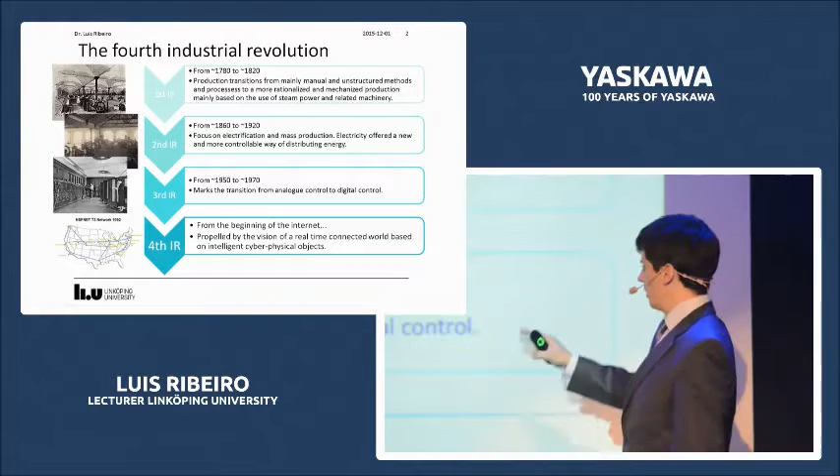You know that from the first revolution we got a lot of innovation, mainly driven by steam power and steam engines. And then later on we got the same with electricity and a lot of electrical power devices. The third industrial revolution is a little bit less concrete. It has to do with the transition from analog control to digital control. And a lot of things that we are anticipating to be within the fourth industrial revolution, we have inherited from digital control, from the third industrial revolution.

The fourth industrial revolution is a little bit special because of that. We cannot pinpoint one single key enabling technology. It's rather a convergence of many different technologies, and at the moment it has mainly a philosophical value. It's not much more than that. It's a vision propelled by the idea of the creation of a real-time connected world based on cyberphysical intelligent objects.

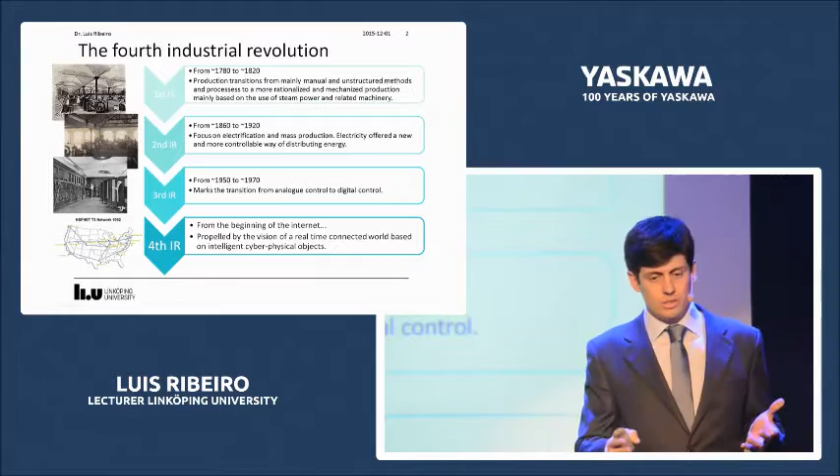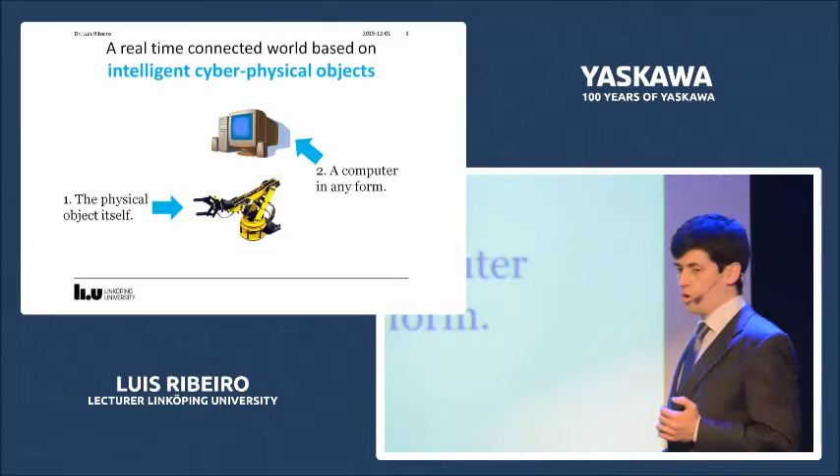Well, this is a mouthful of words. So what does this mean? It takes actually three ingredients to create a cyberphysical object: the physical object itself, any form of computer, and the connection between these two. But this we knew already from the third industrial revolution. This is how our factories are working today. We have a lot of computer-controlled equipment, and we have a lot of communication already between this computer-controlled equipment.

What is really new is that now we are creating a cyber representation, a kind of intelligent layer on top of this whole. And this intelligent layer is really important because objects will start to do things not because they are programmed to do so, but because they are programmed to choose what they want to do. They are programmed to interact with other objects, and they are programmed to learn automatically about other objects.

So one robot will know that another object it's interacting with is a robot, or a human, or a station. And therefore that object will adjust automatically. It will know what to expect from that other robot, from that other human, from that other station. And this is really new.

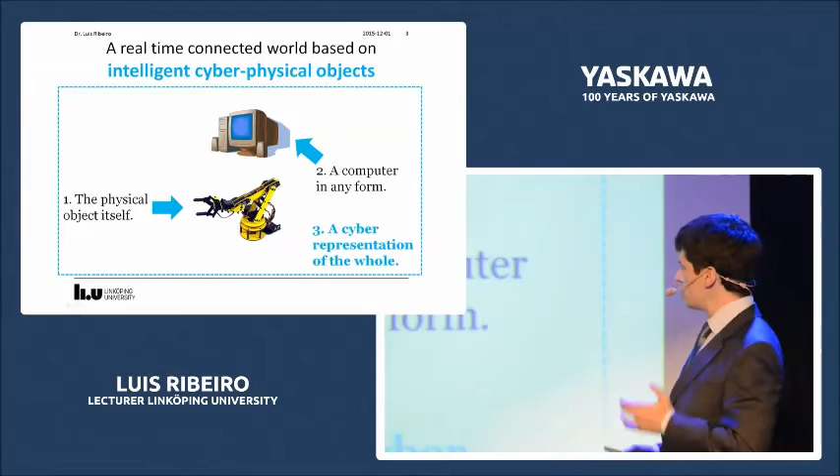There's a massive amount of research really required to bring these visions through, but this is what it's all about, this is really the vision. Then we can take a bunch of these objects, put them together, and create a system, an intelligent cyber-physical system that has a lot of these objects cooperating together.

And when we think of it, we are already taking the first step with the creation of smart objects, smart cars that will be able to drive autonomously, connect to the cloud, extract map information, pre-schedule repairs, understand when they will break down. So a lot of consumer products are already or will be in the near future generating value in other systems.

What we often forget is that the resources that we have inside the factory, they can be themselves intelligent objects. They can themselves extract and collect information. They can generate value out of that information. And they will be someone else's products.

So this is really the vision of the smart factory, a fully connected world, an Internet of Things world, where these intelligent objects can, for instance, understand that another object they need to cooperate with has failed. And they will know, okay, that other object that failed was a robot and it was carrying out a specific process, so I know how to adjust to that. But if it's not a robot, if it's a human, the object will adjust in a different way.

So this is really what it's all about, creating this additional layer of intelligence that massively improves the dynamics of our systems. This is really a knowledge-based system. Objects are actively mining, creating, manipulating more knowledge, and continuously adjusting, continuously learning from what they have extracted, from what they have learned. And that information is automatically fed back.

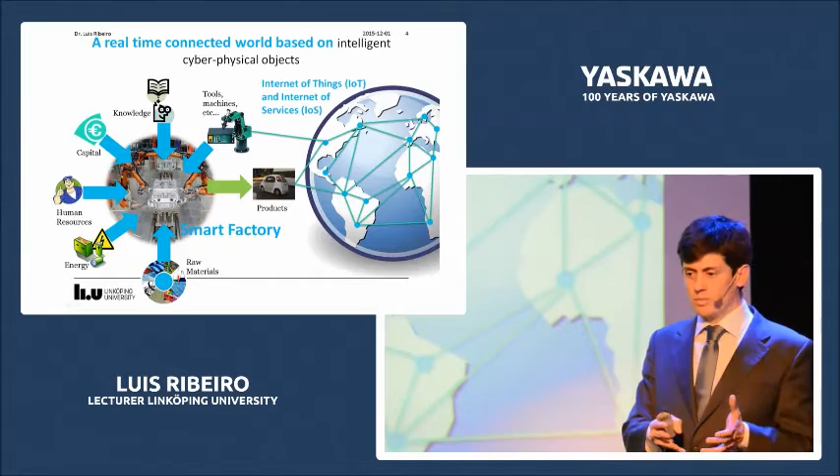And this means that there will be other sources of knowledge as well. For instance, these systems, at least we expect them to be so adaptable that they will extend the useful life of our human resources. People will be able to work longer, will be able to work better because they are supported by the system. So these human resources will also contribute with more knowledge to the system.

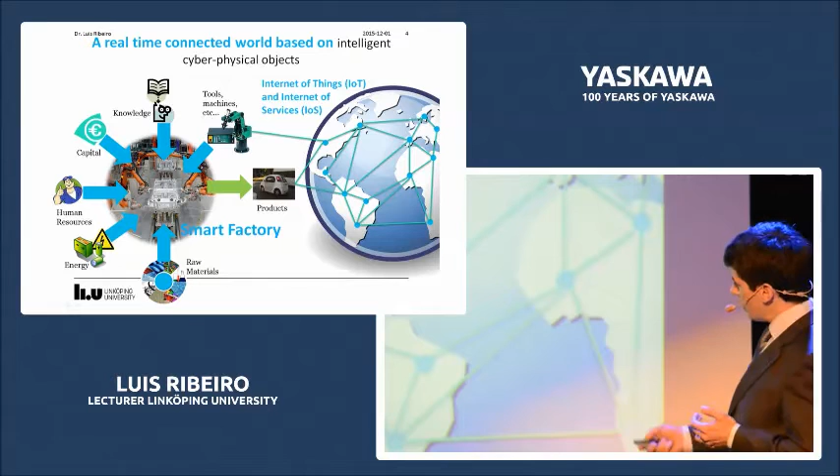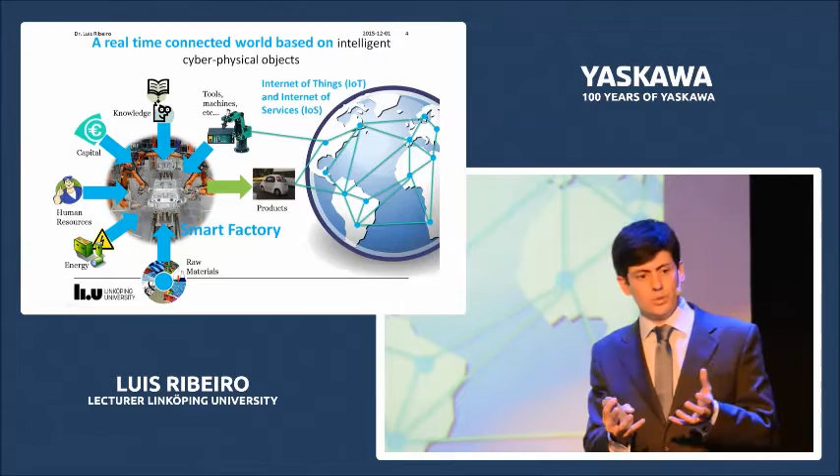So in a way, everything is tangled. All the information that the smart factory produces generates value to create better products, which generate more knowledge, which is fed back to the system again. And this is a little bit the vision: everything is connected, everything is really tangled, and these objects are actively and constantly learning. So this is really the vision.

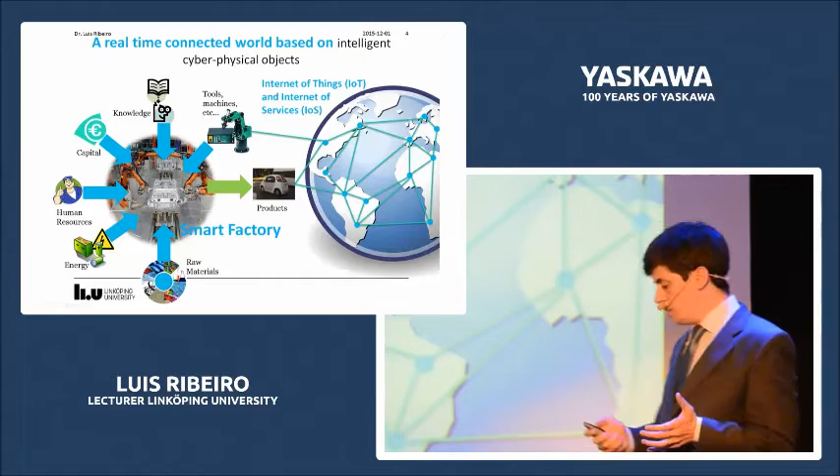The big question now is how far are we from this? And there are a lot of initiatives that are pouring money onto this. In the US, there's the Industrial Internet, which is being committed to the creation of the network infrastructure that can handle the deluge of information that these new systems will generate.

In Europe, we have the Factories of the Future initiative that has been supporting research on the smart factory for so many years now. And in China, we have, recently announced, the Made in China 2025.

This is the Chinese government saying that they want to step up their production, not in terms of quantity, but in terms of quality. They want greener, more connected, more efficient factories.

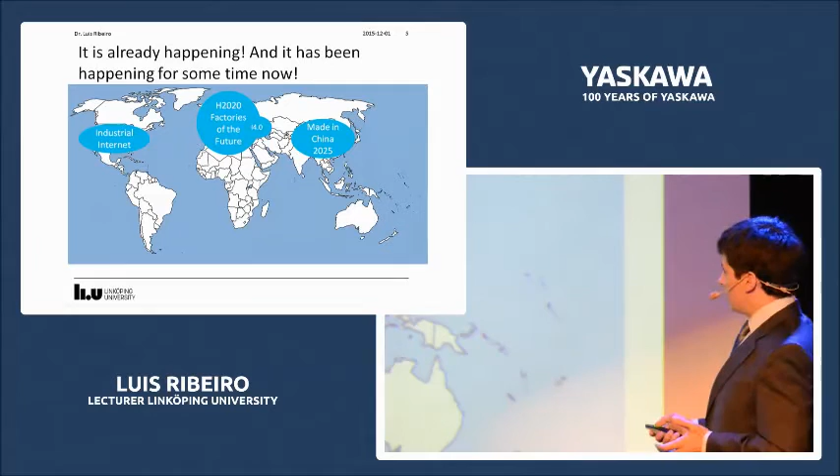And of course, in a subset of Europe, we have Industry 4.0, which is the German initiative that, in one way or another, has triggered all these discussions. So everyone is talking about Industry 4.0 because the Germans are talking about it. And this is an important point.

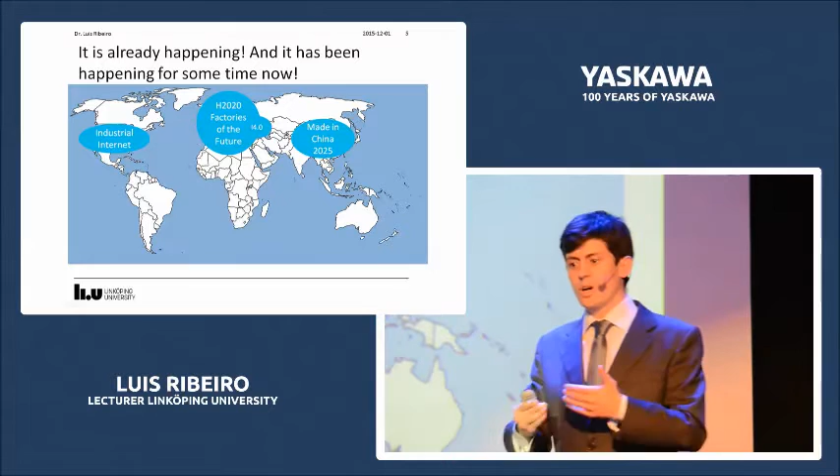It's not by chance, because really Industry 4.0 is the most comprehensive program, the one that has designed the better vision for what is a smart factory. This is why we are all talking about this, and this is why we all, in one way or another, refer to Industry 4.0. But although these initiatives are very recent, it is important to note that a lot of research has been carried out before.

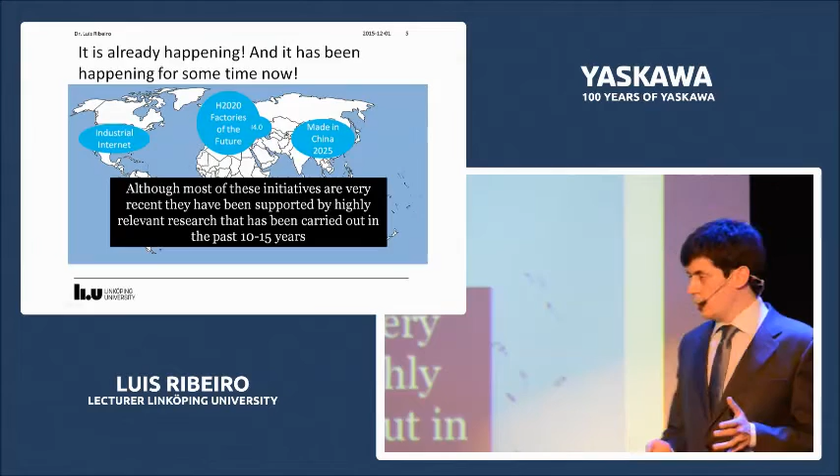Industry 4.0 is a relatively recent phenomenon, but there has been research on this for the past 10 to 15 years, and a lot of good research. I want to share some examples from my own personal experience that show how far the research community has gotten closer to creating a smart factory, based on this idea of intelligent objects, intelligent services, and cyber-physical systems.

The first thing is really the creation of a cyber-physical industrial component. This means we need to turn a robot, a station, an operator into one of these intelligent, highly dynamic entities. The good news is that we already know how to connect systems to a network, so this is not a big deal.

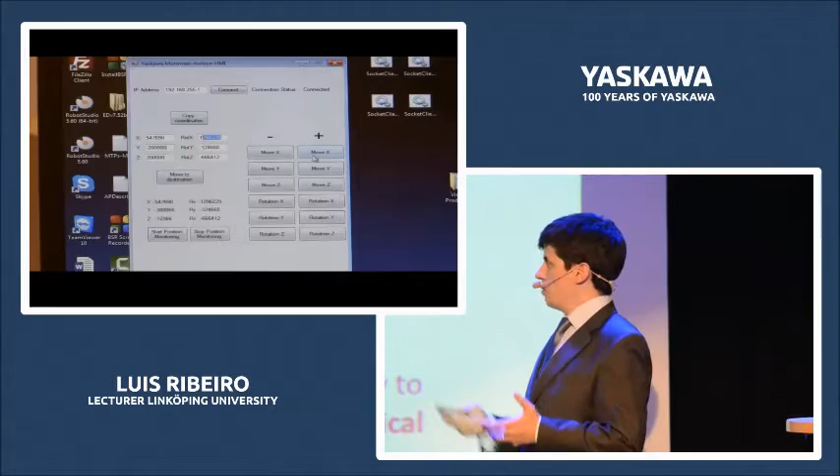Just to give you an example, and this is interesting because it's something we are doing here with Yaskawa Nordic, and this is work carried out by some of my students at LiU. This is remote control using Wi-Fi of a Yaskawa robot.

So this is really the first step, making the object available online. So when he presses the button, it causes the robot to move. It's wireless, and this is really important because now, using that computer, we can place the cyber part of that robot pretty much anywhere.

It can be inside the robot controller, it can be in a cloud, it can be in our own computational infrastructure, local servers - it doesn't matter. But we have the required infrastructure to create the cyber object now.

There's already a lot of previous and excellent research on how to do this and how to connect that. Of course, we need to work on some security issues - this uses communication protocols that are not entirely safe, and security, as we unfortunately know nowadays, is really a pressing issue. So we need to be a little bit cautious about putting a lot of systems out in the cloud until security is better understood. But nevertheless, we can't stop research because of that.

The other interesting problem here is how to maintain this cyber-physical relation. As I said, we can have the intelligent part of this robot living pretty much anywhere, so this will depend from system to system where we really have it. And the other thing is that, and I will come to this later on, very few people really know how to design these systems, and we are starting to educate our students a little bit in this direction.

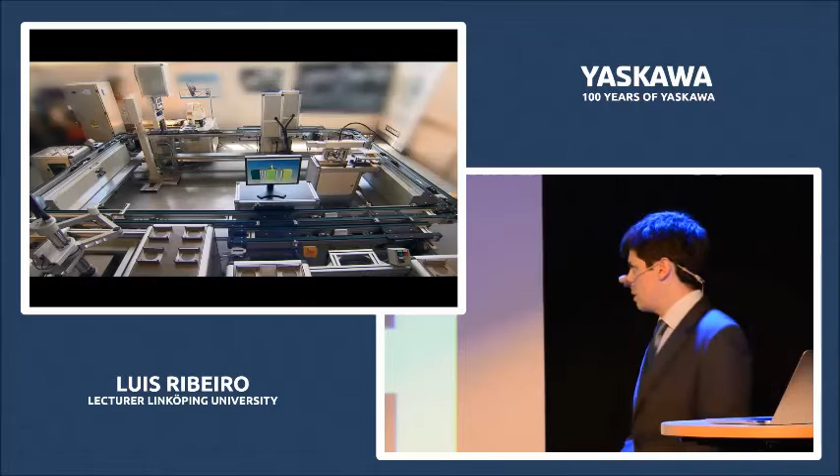So each one of these pallets contains an intelligent product, and you have to imagine these objects are interacting not because they are told so.

When we put the new head on that station, that cyber-physical object will wake up and announce that, hello, I'm here. I know how to do this task for you. If anyone needs me, come and find me.

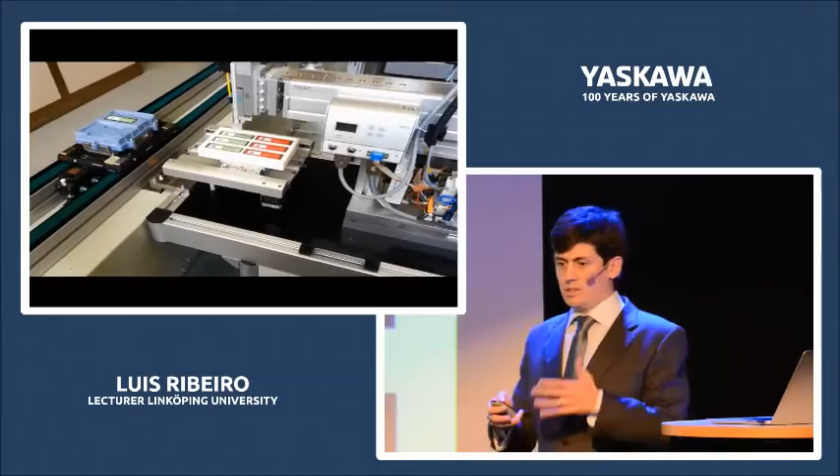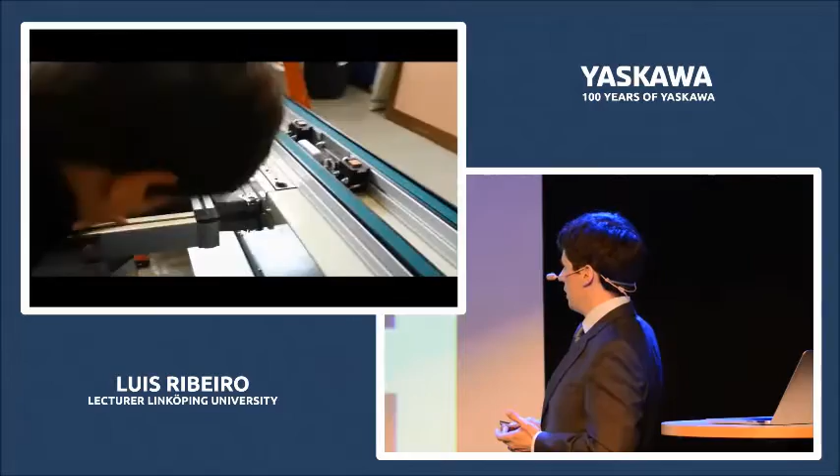And of course, this is a rather simple change, but we can take it to the next step. We can actually take the entire station out and put it somewhere else on the line and have the system adjusting automatically to that. And again, the system is doing so not because it has been pre-programmed to do so, but it has been designed in the way that it can handle these disturbances, it can handle these changes in a rather dynamic way.

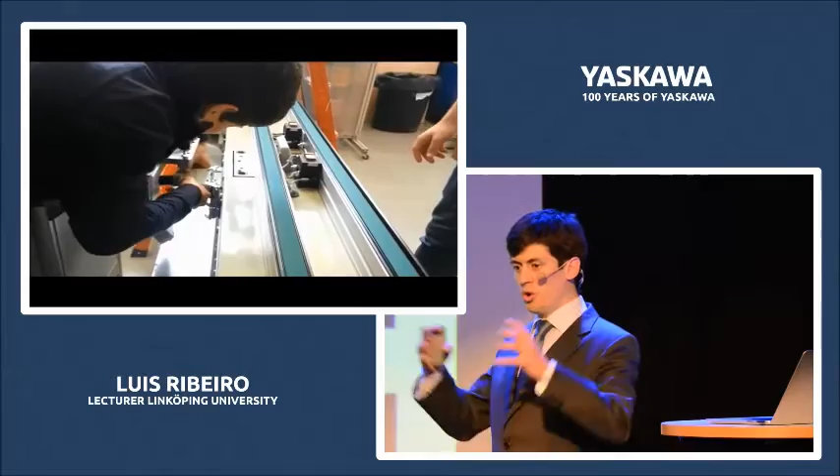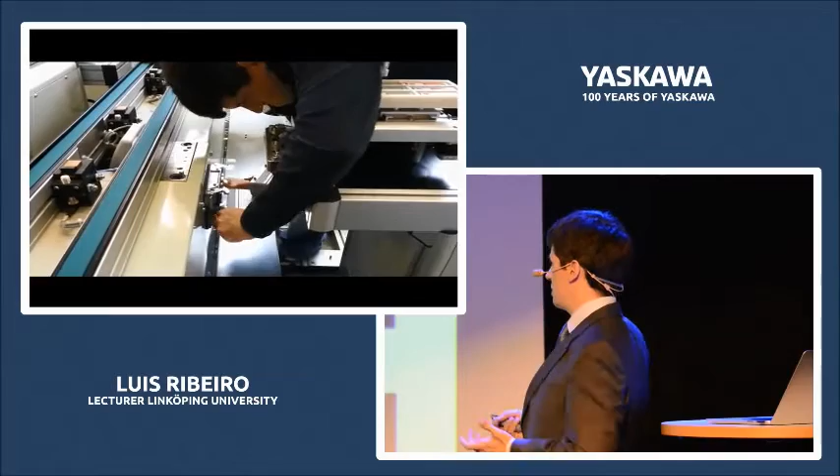So of course, it requires the usual mechatronic interfaces. But then there's, again, the part that we don't see, the cyber part, that it's really the part that is putting it all together. So it's connecting and disconnecting and making it work. We had it from Industry 3.0, making sure that it works again without any reconfiguration, that it's instantly plugged and produced. This is something that it's the cyber part, it's the new part, taking care of it.

So somewhere in the system there will be a product that is looking for this station. As long as we put the station in place, the product will know about this, will find about where the new station is. We'll go there and execute.

And we have a lot of reference architectures that tells us how to design these systems. And we can plug and produce with extremely small ramp-up and setup times. All of this, it's because the objects are not working because they are told to do so. They choose to do so. They have that autonomy. They are able to reason on what's best for them and what's best for the system.

Of course, the problem is that there are so many different contributions at different technology readiness levels that it's sometimes difficult to understand what is what. And we have been very successful in managing the connection between the smart factory and the smart product, while the product is still inside the factory. Once it leaves the factory, there's currently no concept for that.

And when we look at Industry 4.0, these are actually two different separate directions. Some people are going for smart products, other people are going for smart factories. But the connection, it's really important because it adds more value. And of course, everything that you saw, there's no really at the moment standard industrial technology for that.

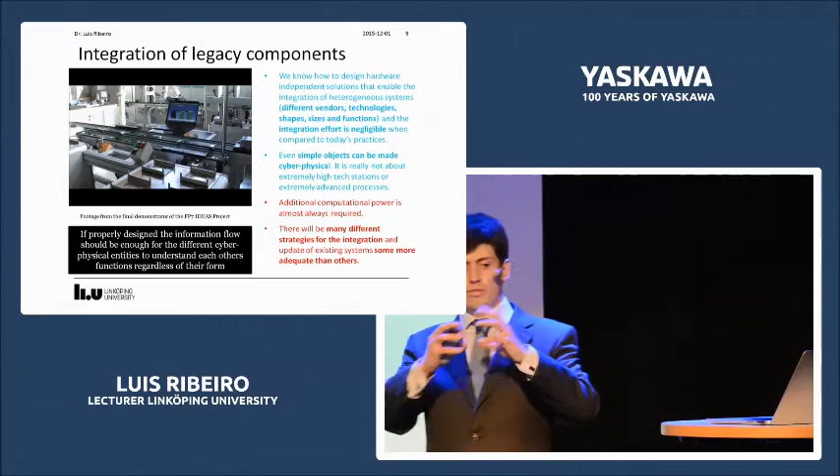The good news is that it is possible to connect these systems in a way that it is relatively system independent. In this system, we integrated components from many different vendors, from many different shapes, many different sizes. And this is because when we design such a system, we focus on the cyber part, on the intelligent part. We don't focus on the fact that it is a robot, or it is a human, or it is a station. We focus on the functionality that it provides and how these objects, these generic objects, could interact with each other.

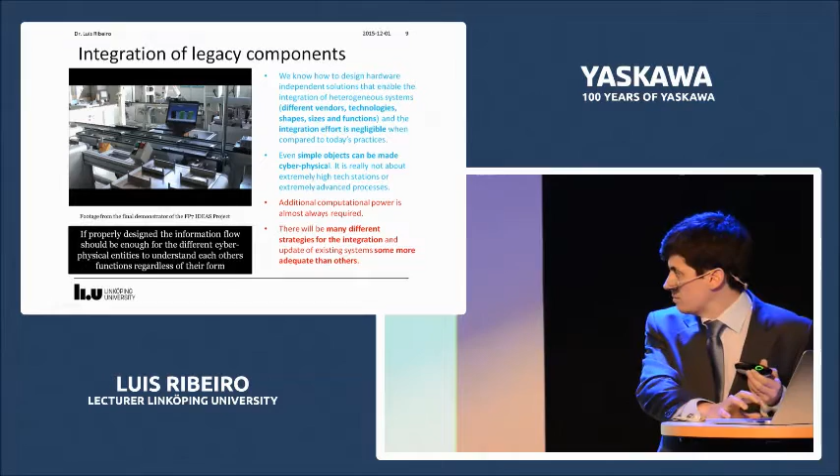And let me give you another example of what can be done with that. So in the video, we have a mix of the physical system with a completely virtual system. Once that product goes in there, it only has an existence in the virtual world. But that simulation, it's really interfering with the physical system.

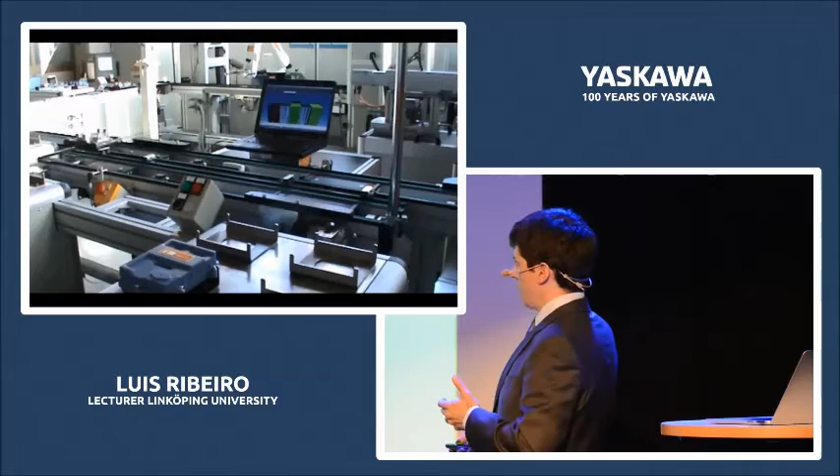So the entire infrastructure that controls this, it's both independent of the physical part and independent of the virtual part. It's above that. So if we want to replace the virtual part, we just disconnect that computer and put the station instead. And it works because we are not changing the control rules. We are not changing the perception that these intelligent components have of each other. We are just changing the hardware, the equipment that they are manipulating.

And this is quite interesting because even simple objects can be turned into cyber-physical objects and can generate value if we connect them in a meaningful way. Of course, we always need a little bit of additional computation power, and there will be many different strategies for integrating this. But it is possible to do, and the overall integration effort, it's really minimal, even when compared with what we are doing today.

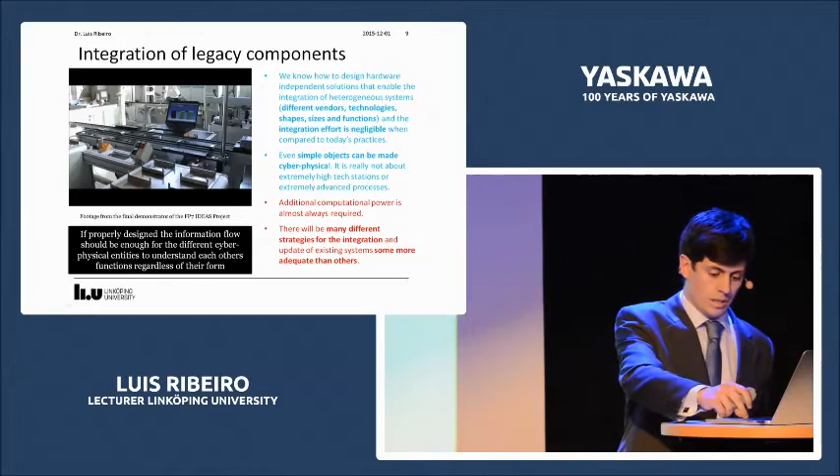This is just to give you an idea about previous research. We recently got an EU application approved. It's called Open Dynamic Manufacturing Operating Systems for Smart Plug-and-Produce Automation Components. So this is something starting now, a very ambitious project that aims at creating the infrastructure for the smart factory on a quite high TRL level.

But the important part here is that all the concepts, they are coming from a set of completely different projects where we were involved before, our partners were involved before. So although we are thinking about the fourth industrial revolution as something new, there is a lot of previous and significant research that relates to that.

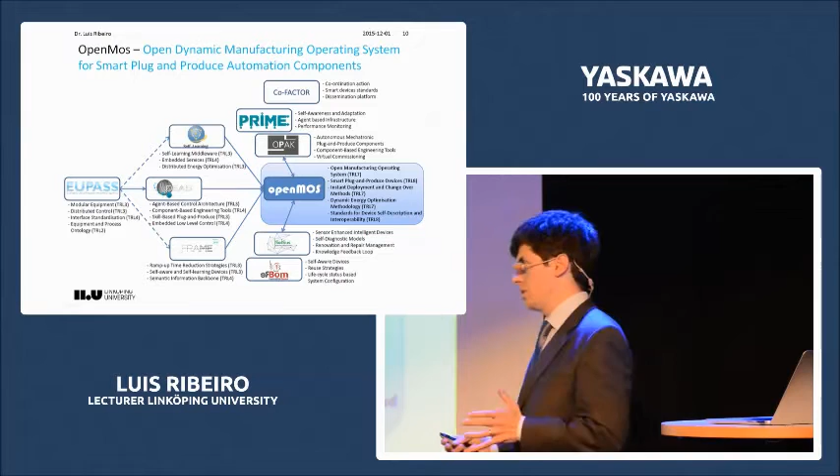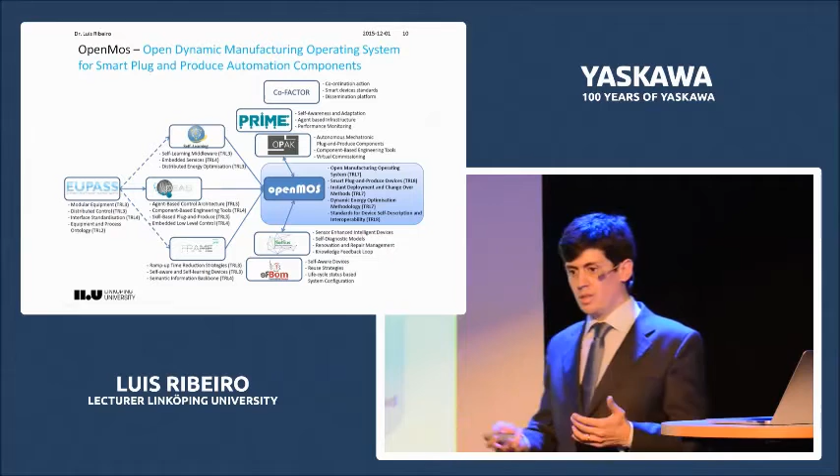Some of these projects date back more than 10 years, and they created the basis for distributed intelligent control, self-awareness, intelligent autonomous components, distributed control, self-optimizing systems, systems that can optimize for energy consumption, that can selectively switch off components, sensor enhanced and self-diagnostic models, and so on and so forth.

So there's a lot of previous research that it's much older than what we now think of as Industry 4.0.

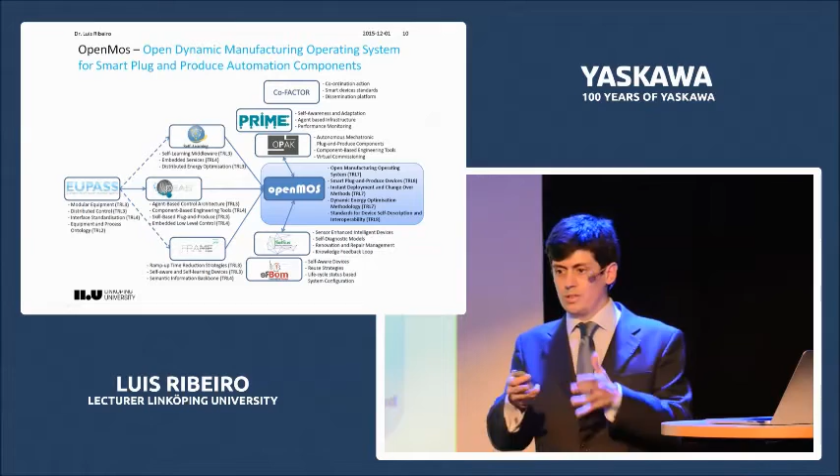And finally, because this is something that is very dear to me and to us at the division, these systems are more complex, more multidisciplinary. So there's a need for educating future engineers on how to understand these systems, how to design them, how to conceive them.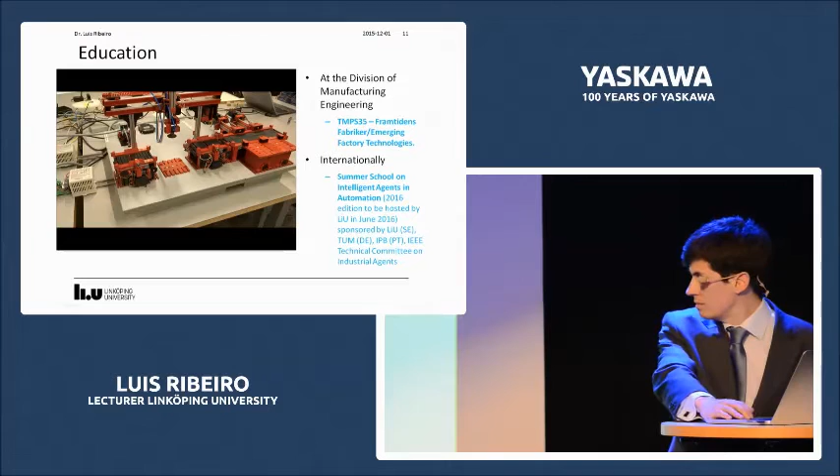Let's get this going. Again, I would ask you to see beyond the conventional system, because the product there is an autonomous entity. Each conveyor is an autonomous entity. And what you are seeing is really several components negotiating and interacting because they understand each other, because they know how to communicate with each other.

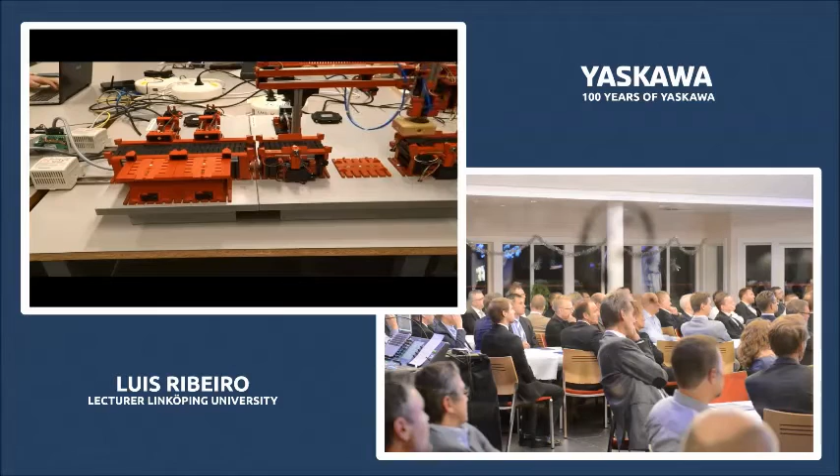And because they are able to do so, we can do what we are going to do next, which is reverse the position of the stations. Without doing any reprogramming or reconfiguration, the product will continue to run, because the only thing they really need is to know that the resources they need from the system are there, and that they know how to locate them.

This was done entirely by mechanical engineer students with very, very little IT background. So I think this is quite impressive for them to be able to pull off such a feat.

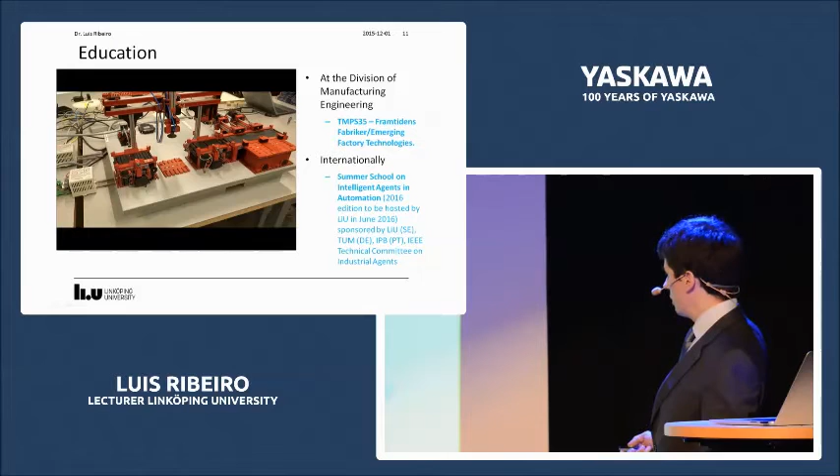And internationally, we have also started the summer school on intelligent agents in automation. We are the founders of this summer school, and we are very proud to be hosting it next year at LiU.

So when I come to think of the full picture and what this might mean for Sweden, I think in Sweden we have an excellent environment for collaborative research, and this is an excellent head start.

And we also have collectively the technical resources to pull this through, but they are separated. They are in many different places, and people are not necessarily aware of the competencies of each other that could be highly complementary.

And it is an opportunity now, actually, because although Germans have started the initiative, a lot of work has been done before, and there are a lot of highly skilled people out there in Europe that know how to design these systems.

And the other good thing is that research in this area is relatively inexpensive compared with other areas where we have more fundamental research. It's mainly about advanced computing technologies, advanced software programming, IT infrastructure, and so on and so forth. So it's relatively inexpensive.

The problem is that the concept is not yet fully understood by everyone. And there are a lot of key players confusing the individual technology readiness levels of certain technologies with the required readiness level of the aggregation of this technology, which is really what is going to power the fourth industrial revolution.